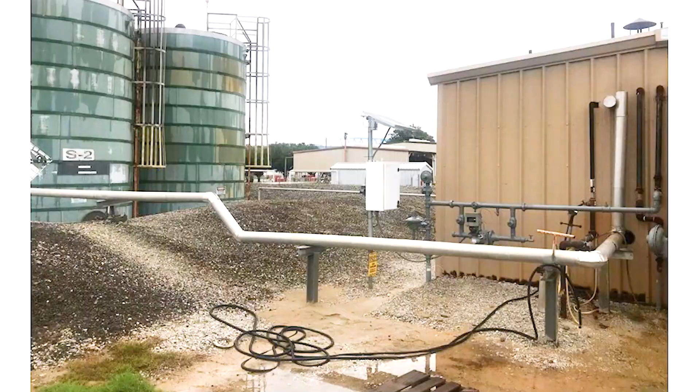one is the fact that here you can see in the picture, you've got a low point in your piping from where the pipe falls coming out of the building over. That area right there collects condensate. When your system shuts down and starts up, there's no way of draining it. So when you go to start up, all of a sudden you've got your steam on, you've got to do something with that condensate. You're going to end up with a water hammer, you're going to destroy piping, you're going to be looking at things like that.

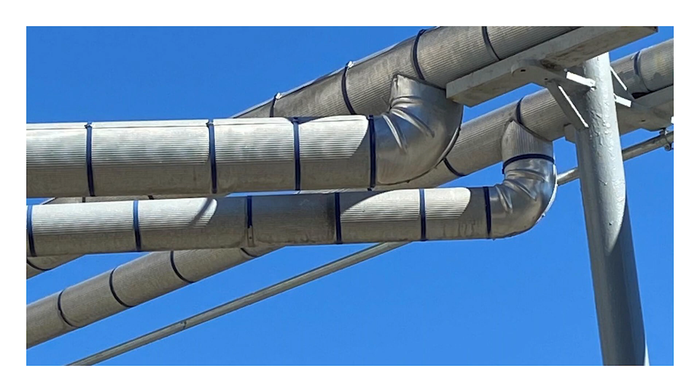So here's an area that we would show to you and recommend that we need to put a trap in to help improve your system process. Other things that we look for to help you understand is, here is where we're taking steam off the steam line and putting condensate back into the steam. And if you notice on these, they're both off the bottom. They should both be on the top.

Why? For steam, coming off the top, you get the majority of the gas and you don't get liquids. Here, it becomes more like a drip leg, and everything that's in that condensate line is falling in, going into your process, which deteriorates the heat transfer of what you're trying to do. Putting it back in on the bottom like that, with the pressure, you increase back pressure in your system, which, depending on how things are installed, could make your trap work or not work. And this can cause problems as well.

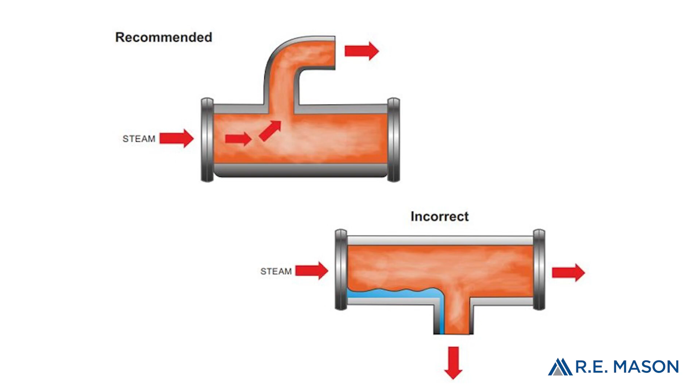If the trap's not working, why is it not working? And here's just an example of where we take the steam off the top, not off the bottom. If it's off the bottom, it's what we call a drip leg. Pipe insulation, we want to look at it. Do you have insulation on the pipe, and why is that important?

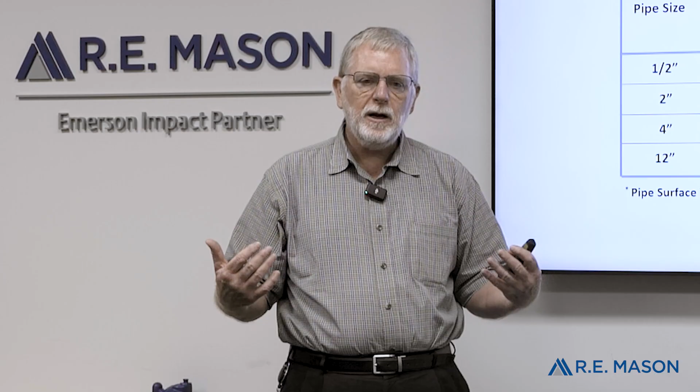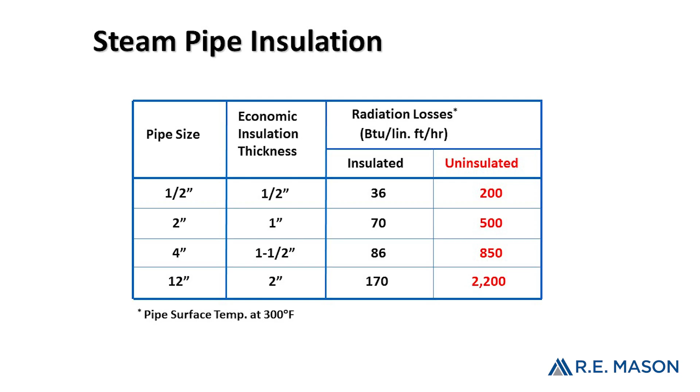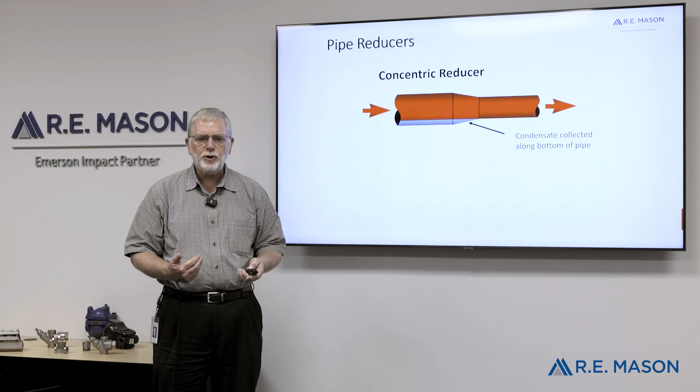Reducers. We're so often wanting to put a concentric reducer in, and as you can tell by the picture, there's a low point there and condensate builds up. So we have the condensate there. In steam, the recommendation is always use an eccentric reducer, because it's like your pipe.

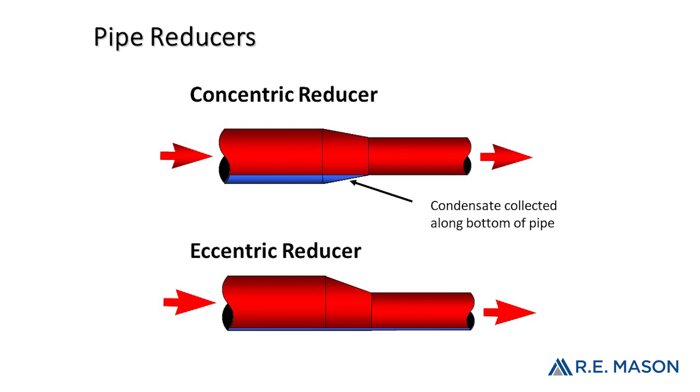It minimizes buildup, whether you're taking this into a control valve, a PRV, or reducing your pipe size. Whatever you're doing, it keeps your flow laminar, and you don't have that area for condensate to build up, there again causing a water hammer. And these are things that are done in an audit that we try to do.

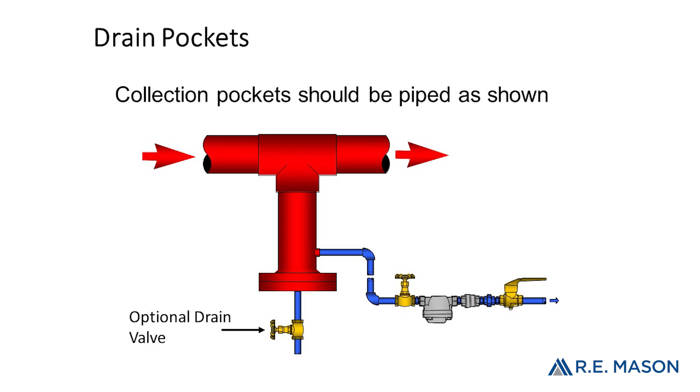The other thing is your drip pockets. This is one of the biggest areas. Your drip pocket, depending on the size of your pipe, is designed to be a certain size. So often we come in, you have like 10-inch pipe with a 3/4 inch drip coming off the bottom of it. And the last time I checked, there was not a stop sign in the pipe saying condensate stop, fall in here. And at 80 miles an hour, it's just going to go over.

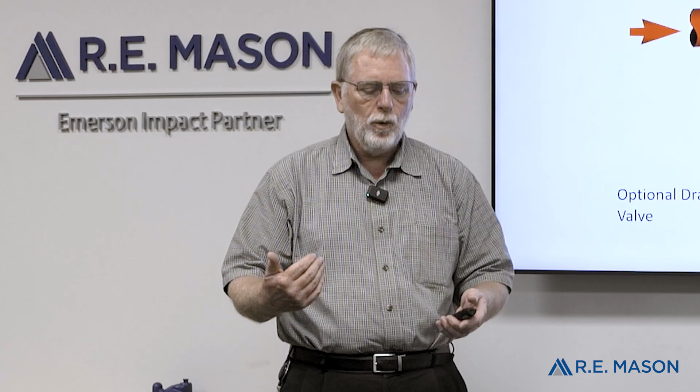We're not going to remove it. The trap will be working, but we're not removing condensate. Just an example of what those pockets should be.